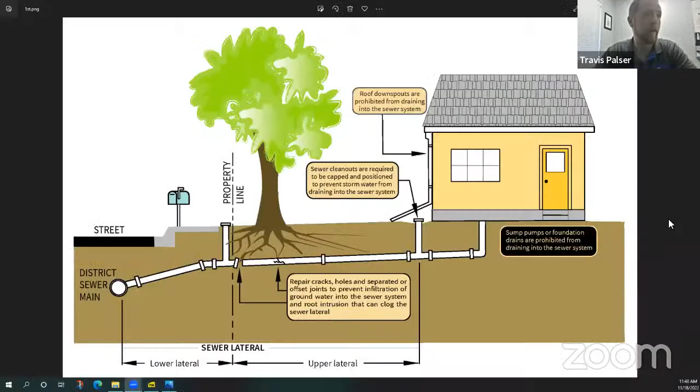It is actually required, it is city code to have a clean out on the exterior of our property. It usually needs to be within 5 feet of our structure, our building. And then we also usually need to have one over by the street near where our property line ends. That's called the city clean out. So we usually have to have two.

A lot of the times though, we won't have two, depending on the age of that house. If the house was built prior to 1970, there's a good chance you don't have one of these installed near your house. You may only have the street one.

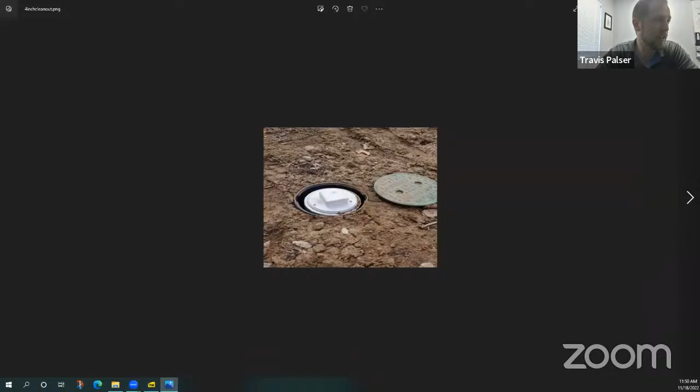So we will recommend that you install a clean out in your front yard as well. So these are the types of cleanouts we do want to see, sticking out of the ground.

This tells us that there's a structural issue with the pipe. There's some kind of separation or break there, and that's how the roots are coming in. And now we have a blockage in the pipe caused by the roots.

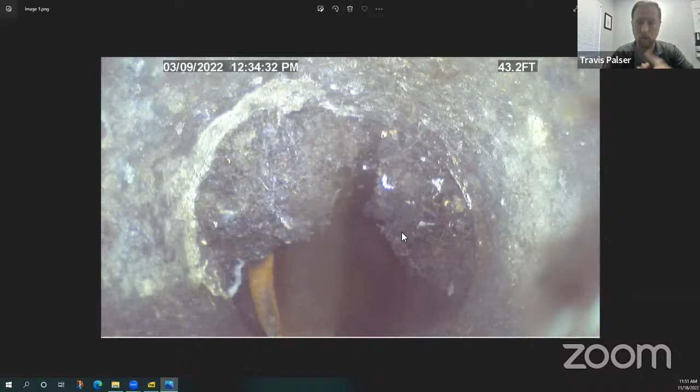So what do we have to do? We need to repair this. We're going to have to dig that up and repair that section of the pipe.

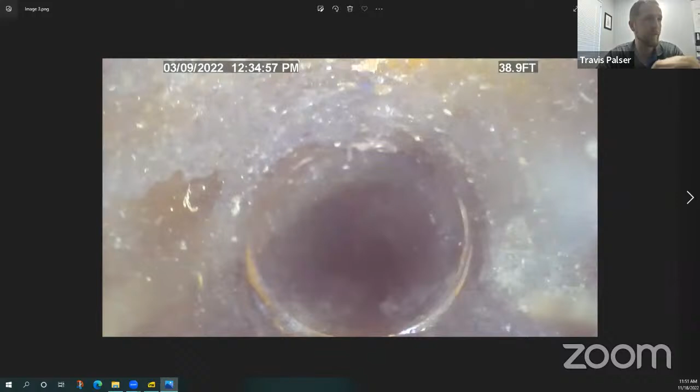Now, if we keep inspecting and we encounter more problems like this picture, we keep finding more and more issues with the sewer lateral. This picture shows us what we call an offset joint. You have some old clay piping that is offset, which creates an opening for things to get in. So that is also something we would have to fix.

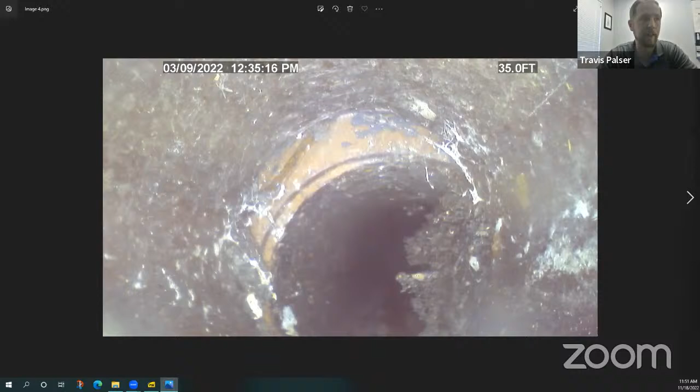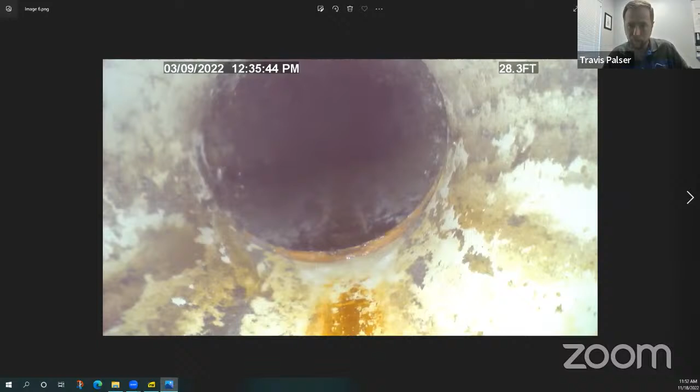So when we start having all these issues adding up, at this point it would be recommended to have the sewer lateral fully replaced, because you have too many issues to do a simple repair. So it would be recommended to replace that full lateral in order to fix it. And that is quite common with the older homes.

So depending on what city you're in, this may not be your problem - it actually is the city's problem. And we can tell the city, we had an inspection done, and we found these issues in the lateral.

This is in your portion of the lateral because it's under the street, so you guys need to fix it. It can depend on what city you're in. If you're in San Jose, if it's in the street, it's not your responsibility, as long as you put a clean out on your property line. Then it's the city's responsibility. You're responsible for the section of piping underneath your property.

Now, if we go down to Morgan Hill, Morgan Hill makes you responsible for the entire thing, including what's under the street. So Morgan Hill wants you to pay for it, even though it's in the street, to fix it. It's your responsibility.

At that point, we would have to get a contractor out who can do the work in the street. He's going to have to dig up the street there and fix that pipe. The cost for that tends to go up because it's underneath the street, and we got to remove that asphalt and concrete to get at the lateral, so that can get a little more pricey.

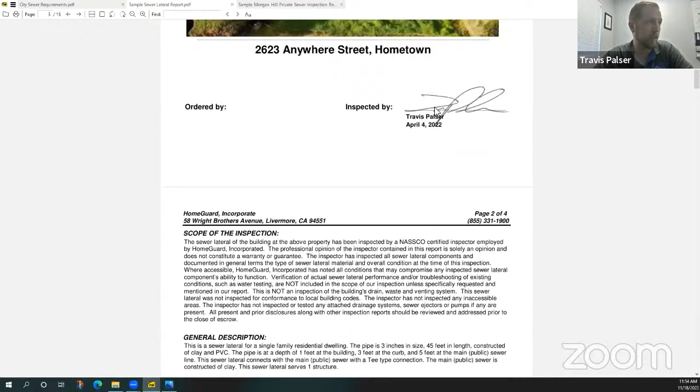This is the report you would receive if we do the inspection on the property. It's going to have a cover shot, picture of the house. It'll let you know who the inspector was, who ordered it, and the date of the inspection.

On the next page, we get into the scope of the inspection, and we talk about what it is we're inspecting and looking at. We give you a general description, explaining what type of sewer lateral you have, the size of the pipe, the length of the pipe, and what type of material it's made out of. We give you all that information.

Then we give you an inspection video. There will be a link in the report that you can click to open up the video of the inspection that was done. You can download that video and save a copy to your own device, or email that link to somebody else if you wish. The link is only good for 90 days, so we recommend downloading a copy for your records.

After that will be an inspection log. This is a log of everything found during the inspection, sorted by distance, from where the clean out is to where the sewer main is. That's how we measure everything with the sewer lateral. We go by the distance of where we found that issue, because that's what needs to be repaired. In the case of this home, a good example here, it says 31 feet.

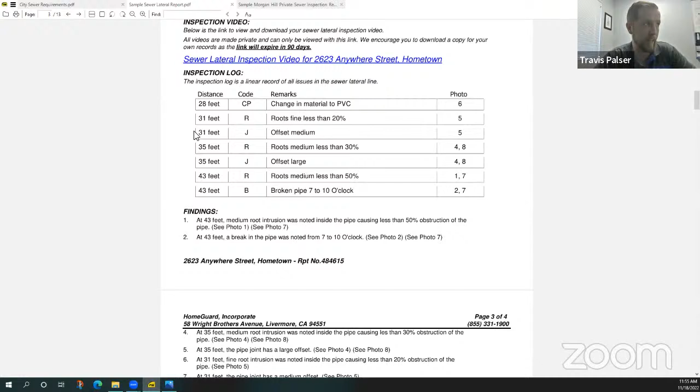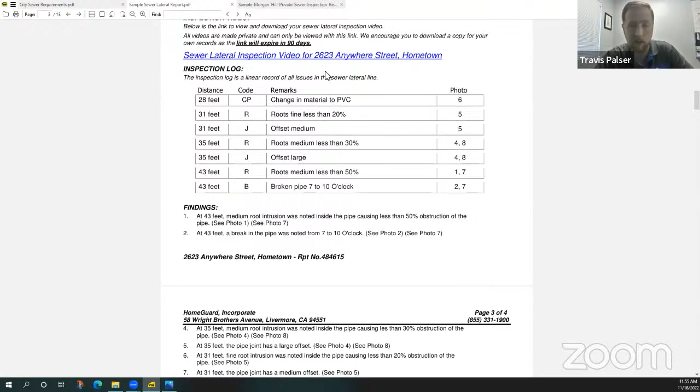So 31 feet from the sewer clean out, he found roots. That's what the R stands for, and they give an explanation here. He found roots, and he tells you what picture it's in. Everything the inspector finds will be logged here, so you can see a log of the findings based off the video. Then underneath, we give you a detailed explanation of what the findings are and what pictures are associated with it.

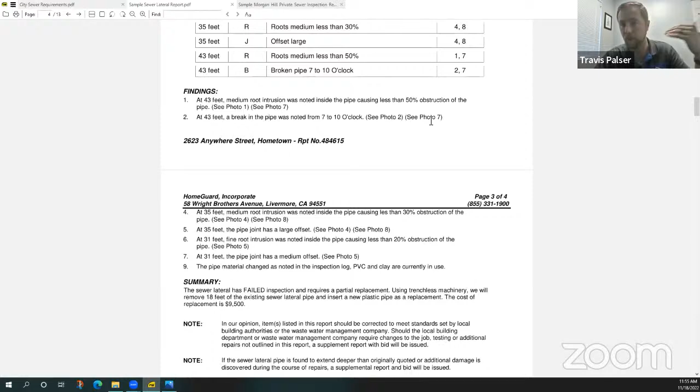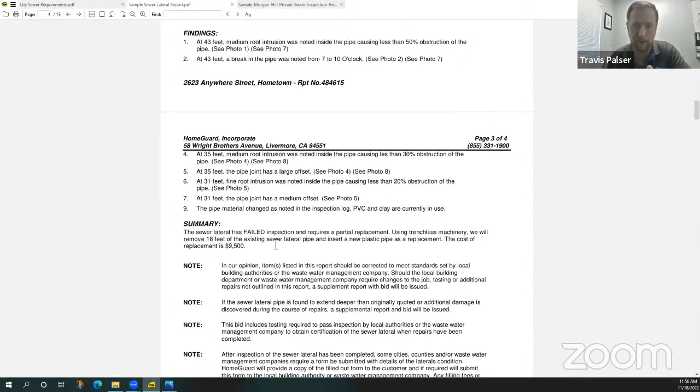After you read through all your findings, it's very important to read the whole report, read everything, don't leave anything out. Just make sure you read everything on that report so you have all the information.

After that, we have our summary. The summary is where we tell you whether or not your sewer lateral has failed or passed inspection. This is the only inspection HomeGuard does where we will actually tell you whether it's a pass or a fail. Our home inspection, our termite inspection, we do not say that, but in our sewer lateral inspection, we do.

And that's because we are going off of a standard from the National Association of Sewer Service Companies, and we're also following whatever city ordinance is in place for that city. If we're in Morgan Hill, it's their city ordinance.

So we're going to let you know if it passes or fails based on that. If we have major issues or any sort of major structural or operational issues, we're going to fail it because the sewer lateral is not up to a passing standard. It's going to potentially cause problems with water getting into the system, water getting out of the system, or blockages. So we're going to have to fail it and let you know what the cost is to repair.

We will give you a bid and a price and a cost to do those repairs. We'll let you know if it's going to be a full replacement, a partial replacement. Maybe it's just a spot repair, maybe there's only one section we have to fix and we only have to dig up a small section of the lateral.

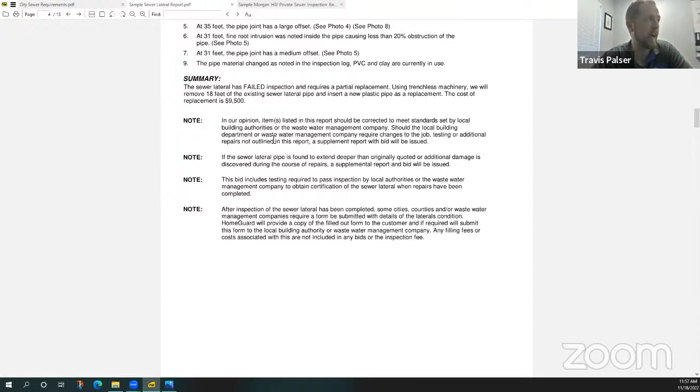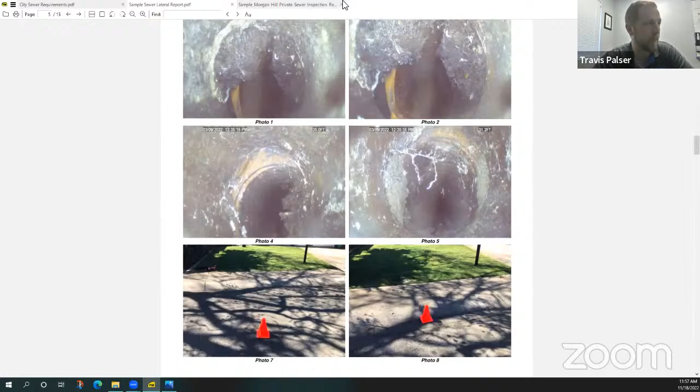That would be the best case scenario if we have to do some repairs rather than a full replacement. After that, there will be some notes provided applicable to your home if necessary. Then you'll see your pictures in your report right after that, all the photos that go along with all those items.

After that will be the work authorization. If you want us to do the work and you'd like to hire HomeGuard to do this work for you, all you would need to do is fill out this documentation, send it in to us, and then we'll have our plumbing contractor come out and make those repairs necessary to bring that lateral up to a passing standard. So that's the report you get.

Now let's talk about Morgan Hill. If you sell a home down in Morgan Hill, this is what you're going to need to have filled out and submitted to the city. This is the form that the city requires be filled out and submitted to them along with the sewer lateral video. They want to see the video.

That link we provided you in the report, you can send them that link in the email with the report, with this form, and then they will review it. They're going to look over everything on this form. So what do we got to fill out?

The homeowner or the agent needs to fill out this top portion of the form with all the property info, and they have to sign it. The property owner needs to sign that form. HomeGuard, when we do our inspection, we're going to fill out our information because we have to sign the form. So we're going to fill out our portion, and then we're going to send this form to you, the agent, and the homeowner, so you can fill out your portion of the form and then submit it to the city.

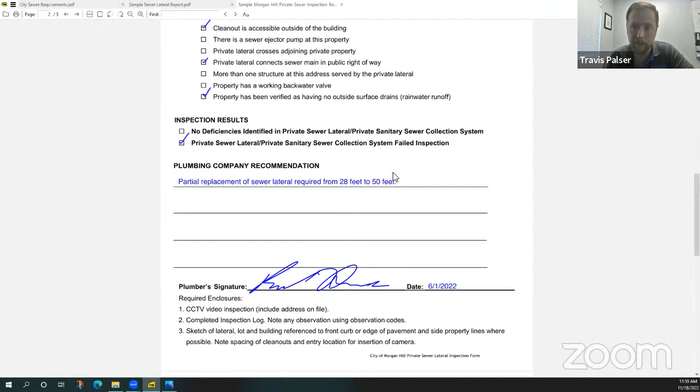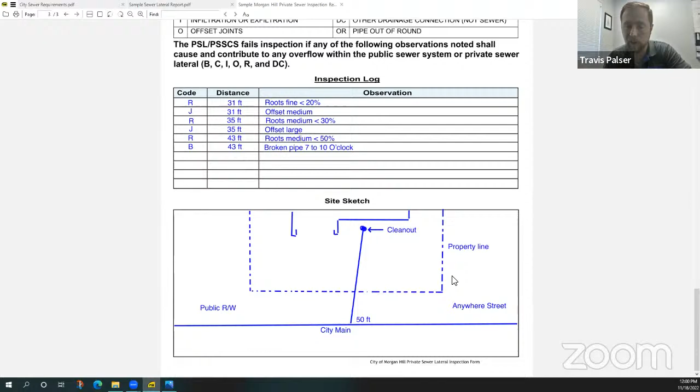And we're going to give a recommendation if it was a fail. We're going to tell the city this is what needs to be done to the sewer lateral. Then we're going to sign it, and we're going to include a little log. They want to see this log, so this log would be basically an exact copy of the log that's on the report. And then we're going to do a little sketch, because this is again what the city wants us to do. And we're going to give you this form. You fill it out, you send it to the city.

Now, if everything is okay and the sewer lateral passes, the city will issue you a certificate that your sewer lateral is up to the standards that the city requires. That certificate is good for, I believe, 15 years.

So it's good for a while. Then if you try to sell the house later and you've got that certificate, you shouldn't have a problem. Now, if the sewer lateral fails, meaning we found some issues and we have to do the repairs, the city is going to require that you get those repairs done before you sell the house.

But there is a caveat to that. The buyer can agree to take on the responsibility of the repair. The buyer will have to fill out a form and submit it to the city, letting them know the buyer is aware that the sewer lateral needs repair and that they will take on that responsibility, and that they will be required to get those repairs done within 6 months.

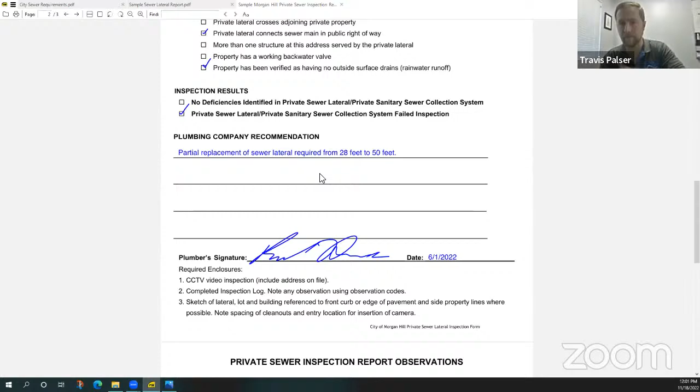So there are two ways to go: fix it, or let the buyer take it on and fix it. That is important to know. Make sure you're aware of that whenever you're selling that home in Morgan Hill.

It's a lot of stuff, a lot of information. It is all available on Morgan Hill's website. They have a very good page detailing everything about the sewer lateral inspection. So always check their website for all the details, okay?

But we do want you to know that you do have to get that inspection done in Morgan Hill. There are only a few companies currently doing the inspection, because Morgan Hill requires that the company doing it is NASSCO certified. And all of our inspectors are NASSCO certified, okay?

So that's all I have for Santa Clara County for right now. That is pretty much all the information for the sewer lateral. Is there any questions regarding the sewer lateral?

Usually how long does it take for the inspection, and also is that for every house or just older houses? Good question. So the sewer lateral inspection typically takes about an hour to an hour and a half to do.

The technician, when he comes out, is going to usually spend a few minutes trying to locate your clean out. He's going to try to find one. Sometimes it's easier to find on some houses if it's a newer house. Sometimes it takes a little bit longer.